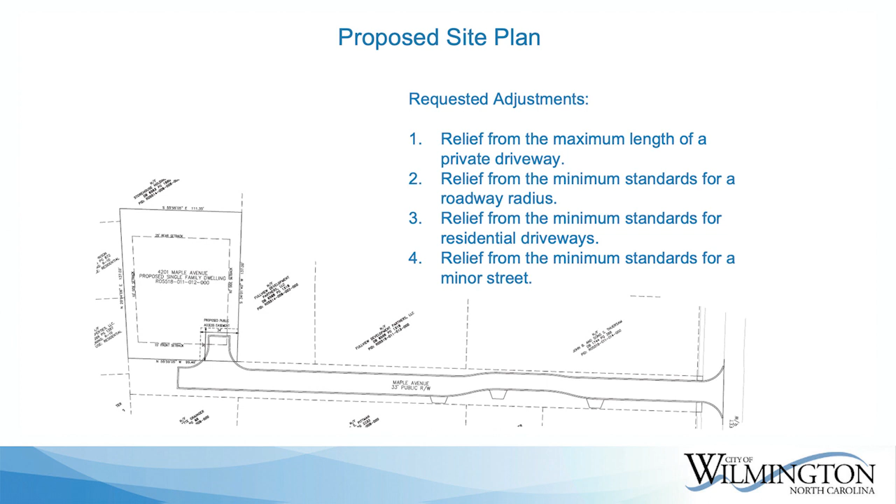Patrick, maybe just a point of clarification, maybe for my benefit. Is there something in the standard that requires this to be a public road, a 500-foot-long minor street with all the public utilities, to serve one resident? It's essentially a driveway, right?

Right. Yeah, public right-of-way that's currently along Maple Avenue. It's currently unimproved. So for further access for any lot along there, they would have to have an improved access to those lots. Even if there's already a private gravel drive there now? I believe so, yes.

Does other staff want to clarify? I can probably answer that, but I don't know if it's most appropriate coming from me. Doesn't any residence or structure have to have access from a public street? Correct, it has to be an improved public or private street or private access easement. In this case, we have an unimproved public right-of-way, so it would have to be built to standard, or as they're proposing, a non-standard improvement.

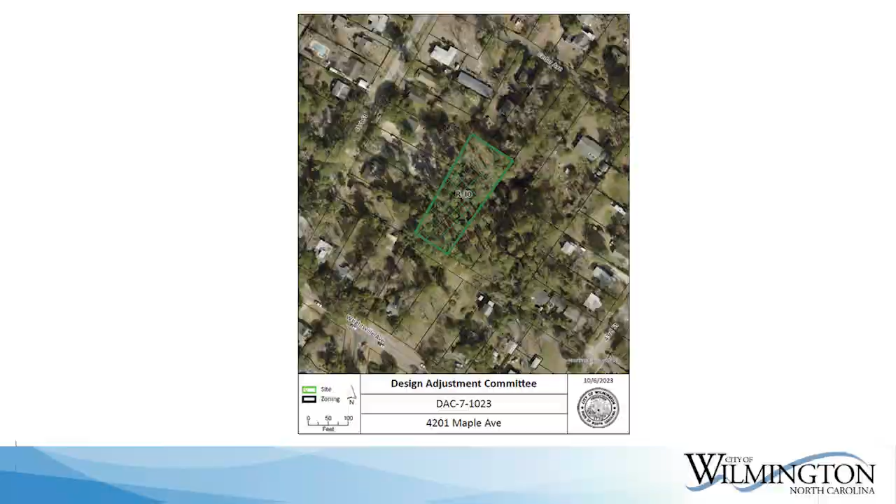I just had one question. The adjustment, would that mean every other property that intends to utilize this would also need a DAC waiver to the driveway in order to attach? Or would this be for the whole street, so that if they needed to attach they could utilize that driveway apron? I'll ultimately defer to the applicant. I believe they're requesting this for the existing driveways, if there are some existing along the unimproved portion. I'll defer to the applicant if that's what they intended to do.

Pat, do you know if there are any plans for Maple Avenue—that looks like the terminus of the Maple Avenue right-of-way. Are you aware of any reason to think Maple Avenue would continue to 41st Street? I think that's 41st Street. It is 41st Street. I'm not aware of any plans to continue that.

Any other questions for Pat? Yeah, a question for you around... Sir, we'll have a public comment period where you'll have an opportunity to speak at that time. It's not really a question and answer period at this point.

Okay, thank you. Does the applicant wish to speak? Hey there, Luke Minas, Stroud Engineering, applicant. I don't have a whole lot to add. I'm relying mostly on all the stuff that Pat's put together. I appreciate that, but I'd like to answer any questions you've got.

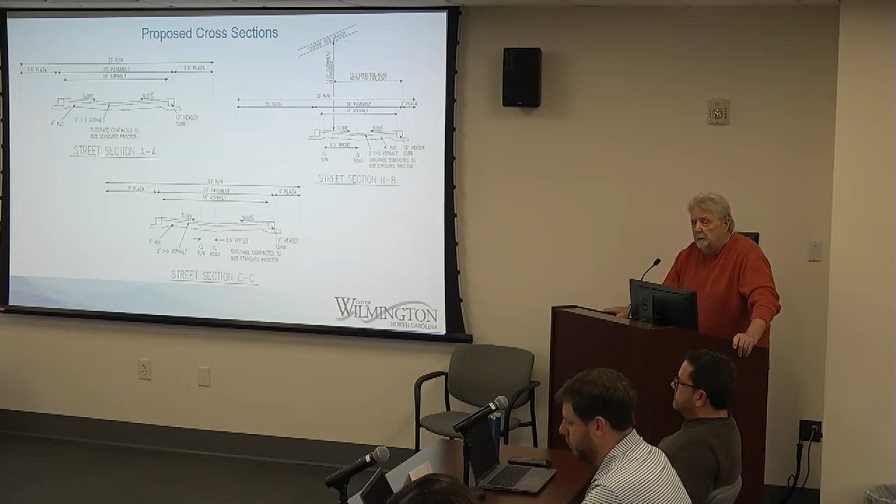We moved there in 1992, and I think in the 1970s the city annexed that part of town. In 1992, when we moved there, the alley was a rutted, almost impassable, mud-filled alley, and I laid down marl. After calling the city in 1992, I asked if they were going to pave it. They said no, there were no plans to pave that street, and this is after it was annexed. So I had it paved to a minimal degree and put down gravel, number 57 rock, I think it was, and we've maintained it to this day.

Two other properties, 4209 Wrightsville Avenue, the corner properties at 43rd and Wrightsville, use that alley, and so does a garage apartment behind 4207. That's the access for that.

We appreciate the applicant's concern about maintaining the character of the neighborhood because it's a historic area. It's Edgewood, adjacent to Audubon. We think that's a very special area and hate to see it diminished, especially with the tree in question, which is a beautiful tree, but we do understand there are constraints necessary for emergency vehicles.

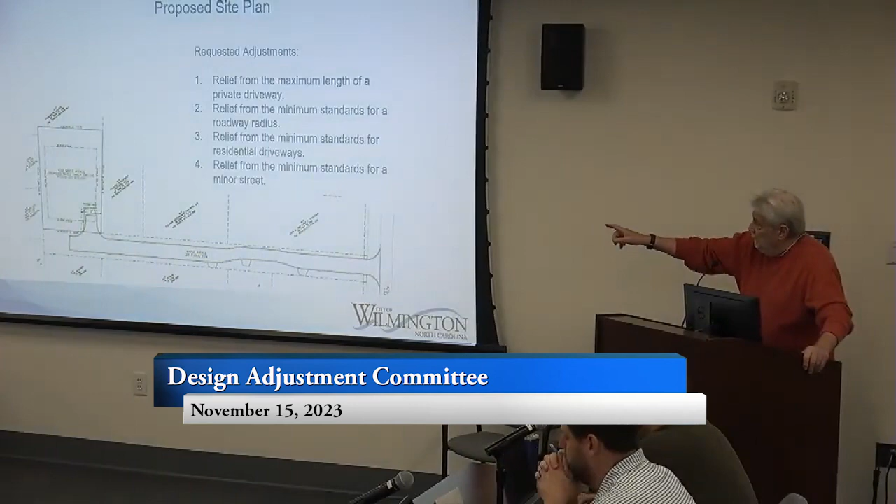One of the biggest concerns we have—can we go back to the other slide showing the whole roadway down to the prospective lot being questioned? Oh, there you go. Our concern is that's the furthest lot behind the row of houses on 41st Street. It's what's happening in between. My residence is here, the very first one on the right.

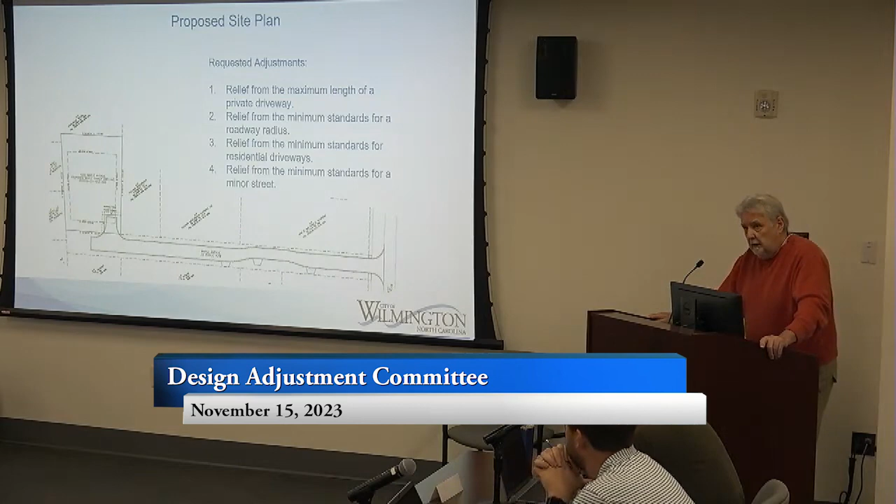We do not want this to lead to spot zoning, as what happened on Cedar Avenue with R5. This is going to be a very narrow roadway. We appreciate that because it introduces traffic calming, and we think that's proper in this context. On both sides, I think there's concern as to what's going in there—is it single-family residence, or will it be more than that?

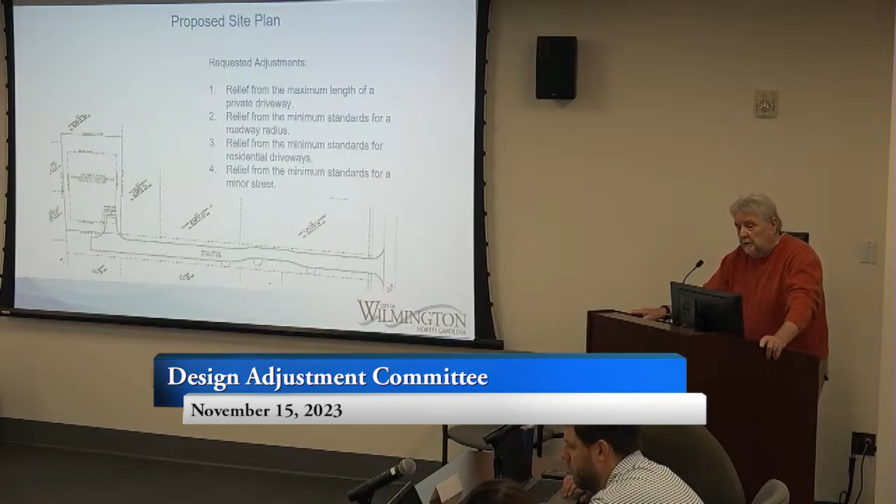My neighbor and I at 4209 Wrightsville Avenue—Mark Saunier owns 4209, he's out of town, but he and I agree and maintain that, number one, there should be no curb and gutter. The question is, where does the gutter take the water to? The inverted section of the roadway we think is a bad idea because it's going to carry water to 43rd Street.

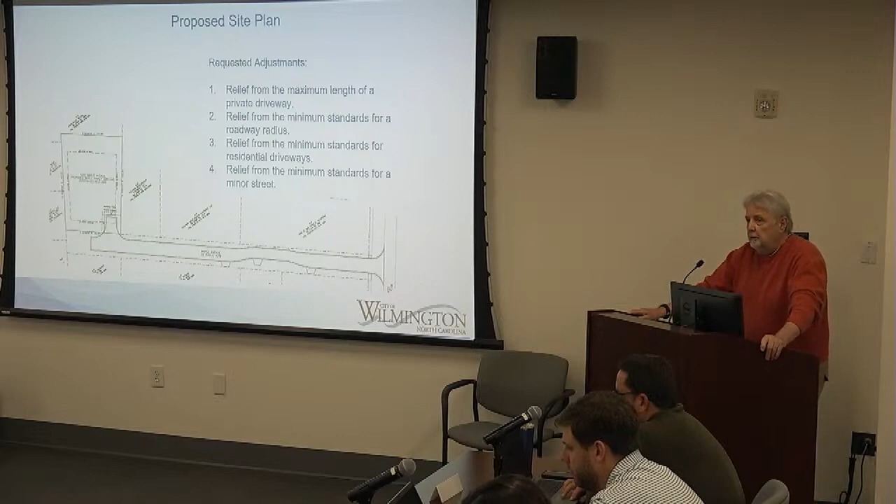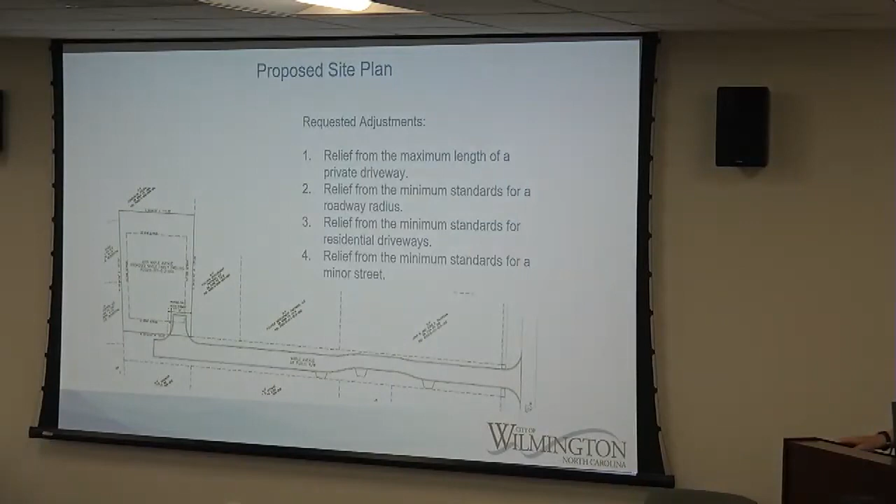That's the biggest problem here, is drainage. We have serious drainage problems on 43rd Street with storms. I've been flooded three times in my garage apartment, the lower level, because of rising water that has no place to go.

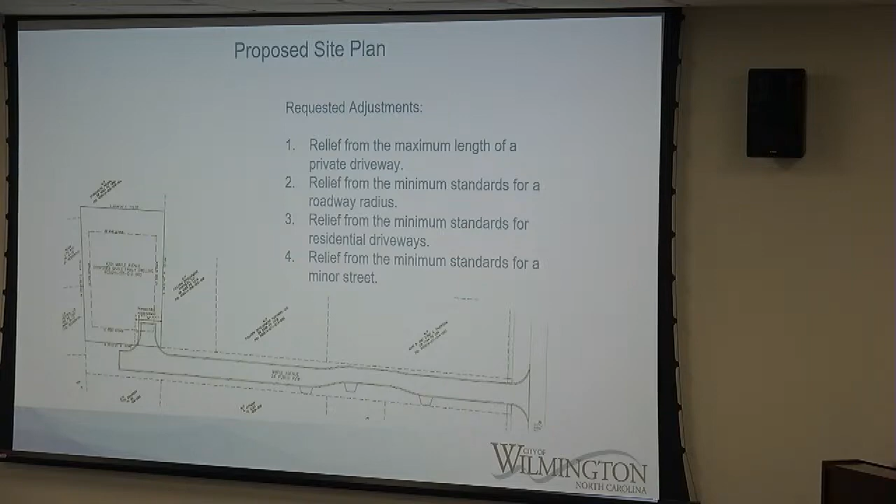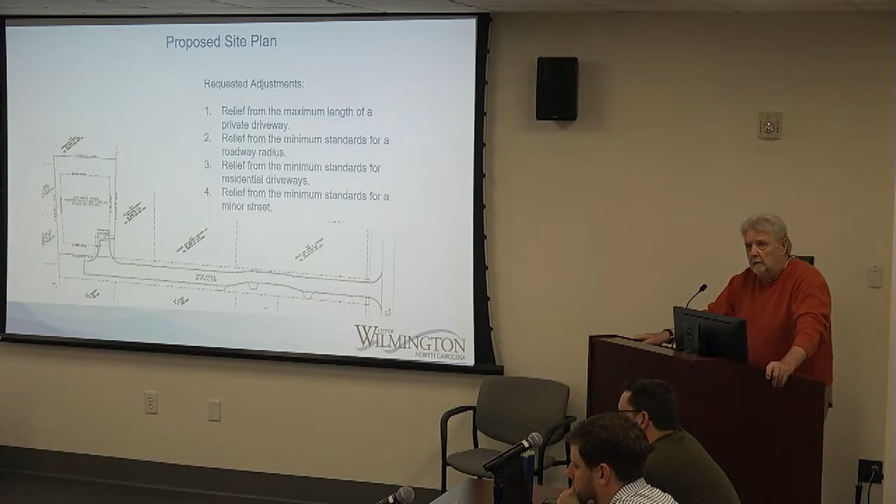The ditches on both sides of 43rd Street carry water from here down to a big retention pond that is overgrown. It's poorly maintained by the city. I personally pay for the ditches, at least on the left-hand side, the west side, to be weeded every summer. I pay it out of my pocket because we can't depend on the city to maintain it. Water just does not flow during storms. If it's a heavy storm, the water backs up and comes right back into the residence and floods us.

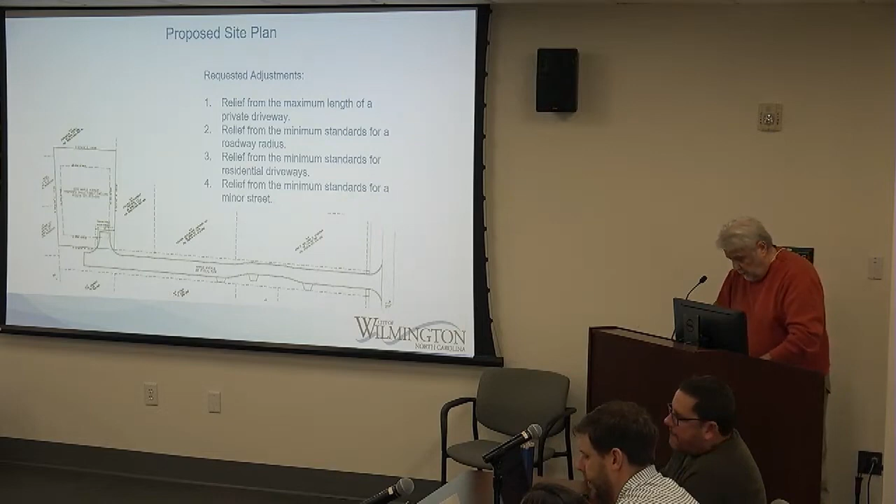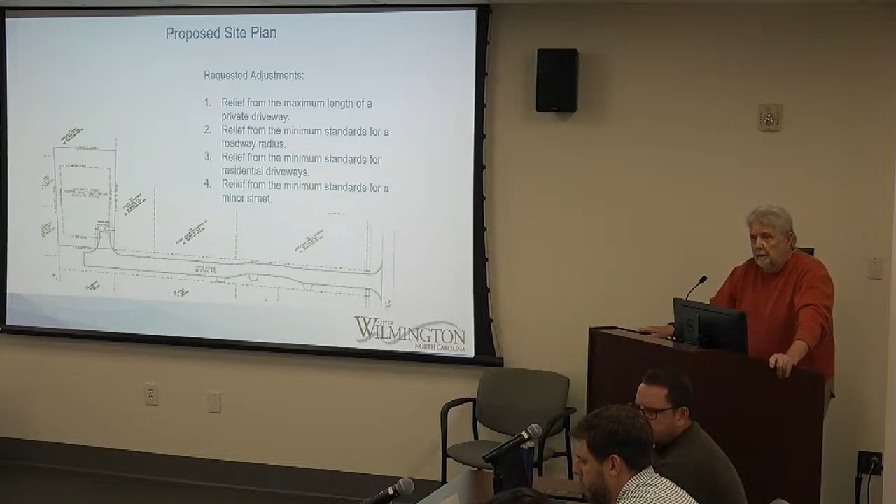So if we're going to develop Maple Avenue, again, where's the water going to? Where's it being sent to? If it's being sent to 43rd Street, then it's already in a clogged situation—it's just going to back up and flood us. So this has to be addressed somehow. And again, we want the road narrow, and my neighbor and I both request that it be pervious concrete, if anything, so the water has somewhere to percolate before it gets to 43rd Street to help with the storm problems.

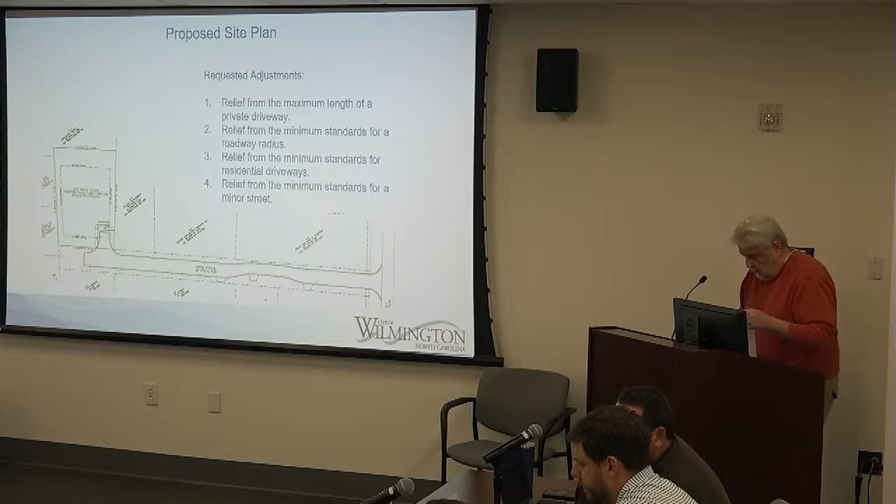I think if this is considered for any approval, a critical thing, in addition to the drainage, is to get down to the end of the street to the retention pond and clean it out. Since the city put it in there, I don't know, 10 or 15 years ago, it's just not maintained, it's a thicket.

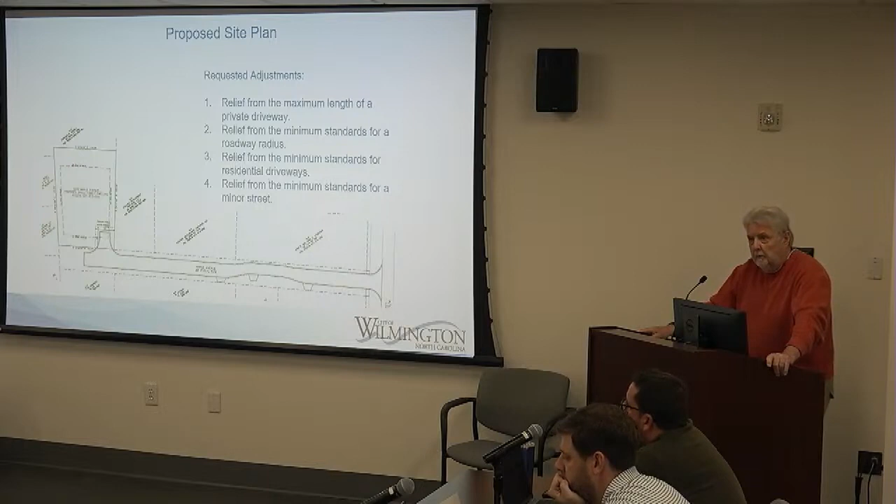It would make a wonderful pocket park to be an amenity to the neighborhood, but the main thing is to have it visible back there so you can see the level of vegetation growth that's going to inhibit any kind of drainage. We need to have clean drainage going down there.

Lastly, if the city's in a creative mood to solve this whole question of getting access to these properties, which I think need access, the property owners certainly deserve that, I would suggest coming off of Wrightsville Avenue with one of these vacant lots, some kind of creative adaptation to get access there and get emergency vehicles back there.

I did have a garage fire back in 2016, which burned down my 3-car garage on my property. The fire trucks had a hard time getting there because of the road, the alley. They couldn't get a truck back there very easily, and the fire hydrant is out at the corner of Wrightsville Avenue and 43rd Street. They had to run a hose all the way back there, so that took extra time. Having a hydrant back there is certainly going to help.

And lastly, there's ditches here and here going to Wrightsville Avenue that do not drain. We have no idea where those ditches drain to. They will fill up, especially the one at the corner, after a storm, and it has nowhere to go. We've had the city out there numerous times, 3 or 4 times, and no one knows where that ditch drains to. So that's another part of the drainage puzzle to solve before any development can move forward.

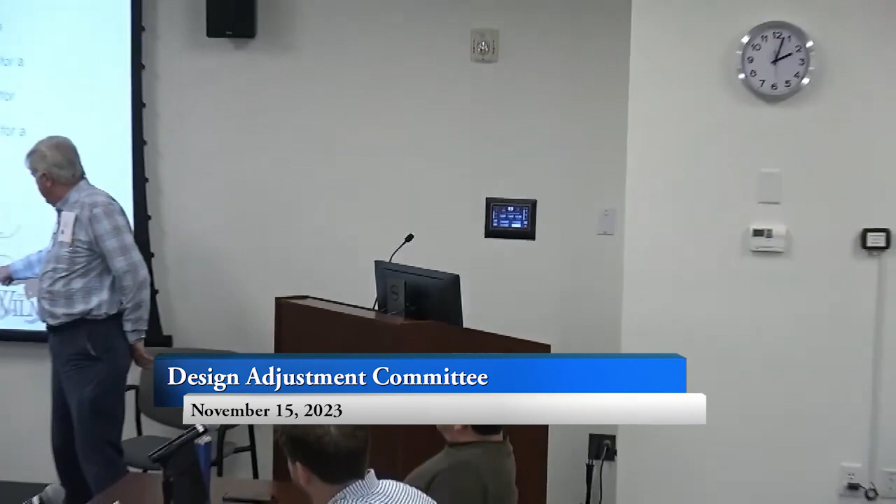Doesn't pay to be late, does it? My name's Alvin Rogers, his dad. Anyway, I own, well, this would be Bernie's lot here. Adam owns here, I own the house on the corner of 43rd and Wrightsville. Owned it for a long time.

Anyway, Wrightsville Avenue used to be a 2-lane road, until they widened it up and brought it almost to 43rd Street. After that, I didn't connect the dots right away, but sometime after, when we began to have rains, that ditch at 43rd Street literally fills up on both sides.

I don't remember who he was, but years ago there was an engineer that did some checking, and the ditches used to drain to Kerr Avenue. When they widened the road, for whatever reason, they closed one off because they thought our water drained the other way. But the problem with our drainage is it now has to go uphill towards Cedar Avenue, so it doesn't drain, it percolates into the ground. So drainage is a problem there.

With regard to the road, the idea of a pervious surface might be the most practical thing, so that we can at least utilize what drainage we have. And that piece of land back there is big enough for extra housing.

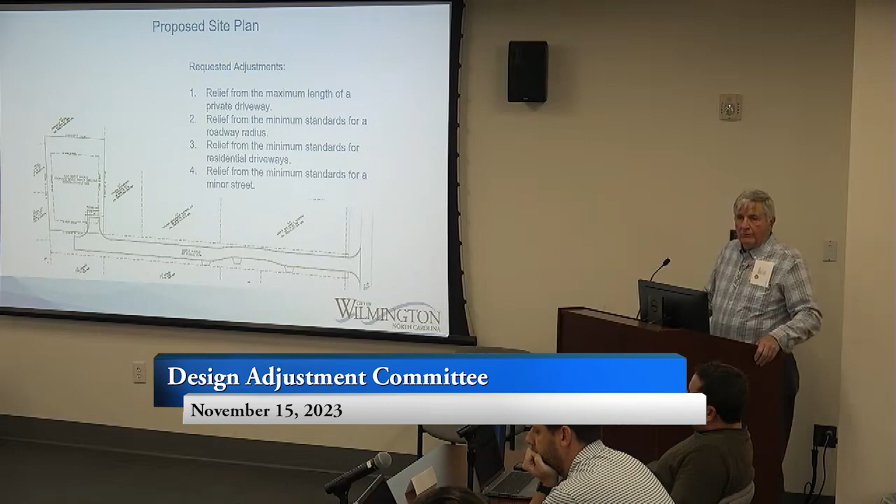So is this road that we're putting in now supposed to take care of any other units? The city's been putting in some high-density multifamily in single-family areas now. If a greater density is put in there, what impact will that have on the road? Will whoever adds more units have to upgrade that road, or are we stuck with what's being put there? It makes one wonder.

Well, unless y'all got any questions of me, I'm done. Thank you, sir.

I think at this point it's been 10 minutes. Did you wish to speak too as well, sir? Okay, sure, by all means.

Sir, can you step to the mic?

It's beyond that. Not only does it not drain, but we've had people out there several times from the city and the state to look at it. Both times, city and state said it's not our problem, it's the others'. So it needs to be dealt with, because when the water starts coming off this new road, it's going to go into the ditches where they have not done any work cleaning it up, just like the other gentleman said. So it is a problem.

I'll just say, in general, I feel like this facility would work for where it is. I do agree it sure would be nice to find a way to get some kind of sidewalk in there. If the roadway's offset through the pinch area, could we offset the roadway through the entire area and provide room on one side or the other for that sidewalk? But essentially, with it not being a through street, I don't have much concern over the narrowness or the other variances being requested. Yeah, I don't have any concerns with the narrowness of the road, personally either.

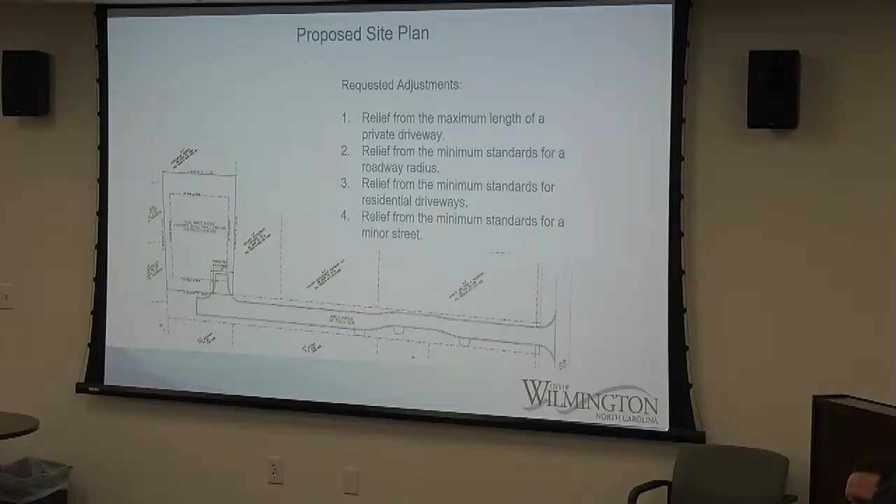I think that contrary to maybe the public opinion, I see the inverse crown as probably an improvement over the standard with respect to drainage, because you're only putting one pipe on the ground. A normal crown road has pipes on both sides, which will run utilities closer to the trees.

I feel like I can support the inverse crown suggestion. Not sure that necessarily needs a variance, but it's been applied for, so we'll take some action on it. But for me, the biggest issue is, does that one tree warrant effectively elimination of sidewalk?

Comprehensive plan section 6.3 policies on urban forest: tree preservation shall be a priority in developments where significant clusters of trees can be protected from meaningful impact in appearance. Planting of street trees with frequent spacing should be a priority where density of buildings, infrastructure, and required grading makes preservation of existing trees unfeasible.

I agree with what you're saying. I think the comp plan favors connectivity, but it also favors clusters of trees. Is this necessarily a cluster of trees, or is this just one 22-inch tree that may already be impacted by existing development, and has the opportunity to be significantly impacted if an emergency vehicle needs access, even a UPS truck? To me, that causes concerns over whether the tree is being saved or we're just prolonging its death.